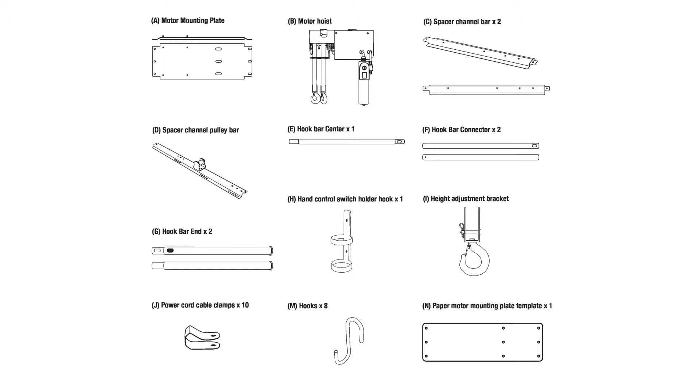The components in your kit include a motor mounting plate, motor hoist, 2 spacer channel bars, a spacer channel pulley bar, hook bar center bar, 2 hook bar connector bars, 2 hook bar ends, hand control switch holder, 2 height adjustment brackets, 10 power cord cable clamps, 8 hooks, and a paper motor mounting plate template.

The included hardware contains 12 4-inch lag bolts, 4 5/16 inch nuts, 2 1/4 by 1/2 inch bolts, 1 1/4 inch lock nut, 1 15 mm hole saw drill bit, 1 1/2 inch socket, 1 1/8 inch drill bit, 2 drywall screws and plugs, 10 30 mm screws, and 2 200 mm cable ties.

The tools required for this installation are a power drill, step ladder, pliers, safety glasses, ratchet, adjustable open-ended wrench, Phillips screwdriver, tape measure, pencil, stud finder, and a utility knife.

Determine the motor mounting location on the ceiling. An unobstructed operating space of at least 3 feet by 4 feet is required. The motor mounting plate should be installed at least 3 feet away from walls or any other obstructions and close to a power supply, preferably a ceiling outlet.

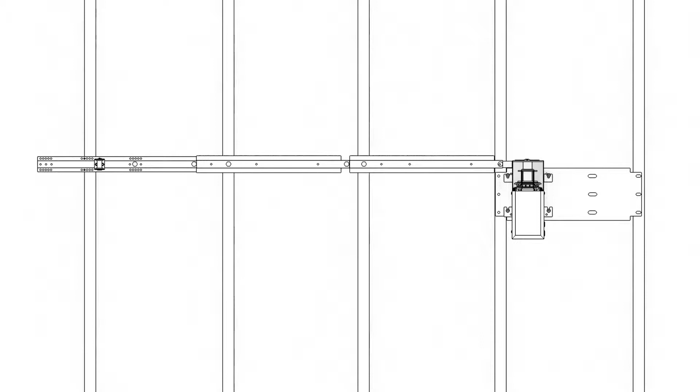The motorized lift is designed to be installed either perpendicular or parallel to the ceiling joists and can be installed on joists with 16 or 24-inch spacing. In the chosen installation area, determine the direction of the ceiling joists and the exact location of the ceiling joists by visually checking or using a joist finder or a very fine drill bit.

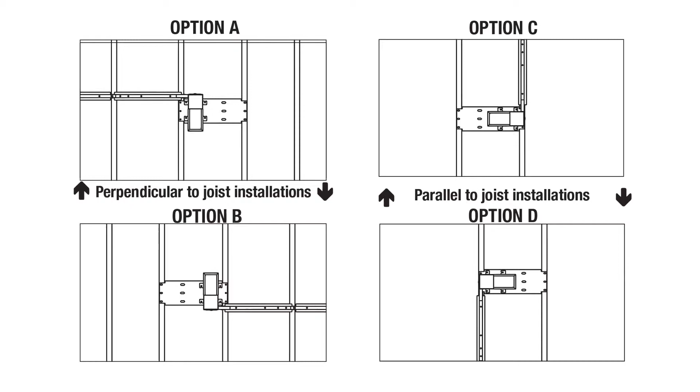4 installation options are illustrated below. Note how the motor mounting plate and motor hoist are positioned for your installation, in particular the location of the 4 fixed threaded bolts on the motor mounting plate and the 4.5 inch spacer channel bar attachment tab on the motor hoist. Determine how the motor mounting plate should be rotated or where the fixed threaded bolts should be located prior to fastening to the joists. Identify your installation option. For this installation video, we'll be installing option C.

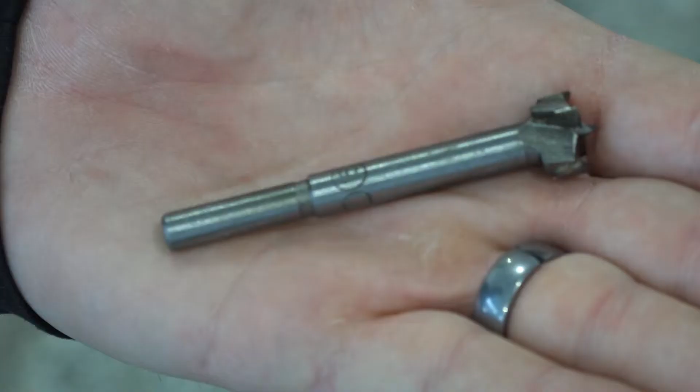Step 1. Position the paper motor mounting template in the installation location and mark with a pencil the 6 spots where the lag bolts will be fastened. It's very important that the wood screws are fastened to the center of the joists. Use the hole saw drill bit or cut away the drywall with a utility knife to obtain an unobstructed view of the width of the joists so that the exact center can easily be determined.

Step 2. Using a power drill with an 1/8 inch drill bit attached, drill 6 pilot holes into the center of the joists. Using the ratchet and 1/2 inch socket, fasten 6 of the 4-inch lag bolts into the joists until the motor mounting plate is securely fastened.

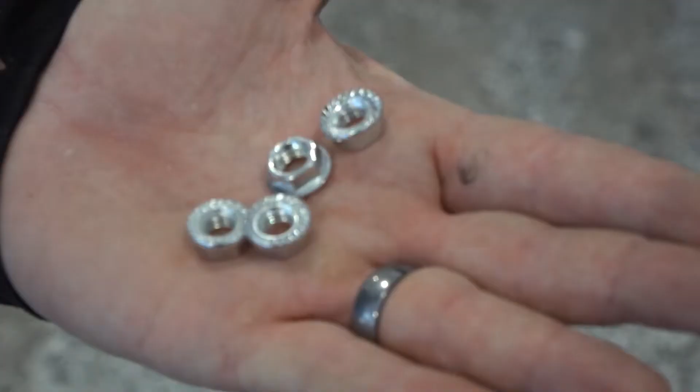Step 3. Slide the mounting tabs on the motor hoist over the top of the 4 fixed threaded bolts on the motor mounting plate. Once the motor hoist is properly positioned on the motor mounting plate, tighten the nut with the ratchet or the adjustable wrench until the motor hoist is securely attached to the motor mounting plate. Slide the motor hoist until the tabs are firmly against the threaded bolts. Do not leave any space between the bolts and the enclosed end of the mounting tabs.

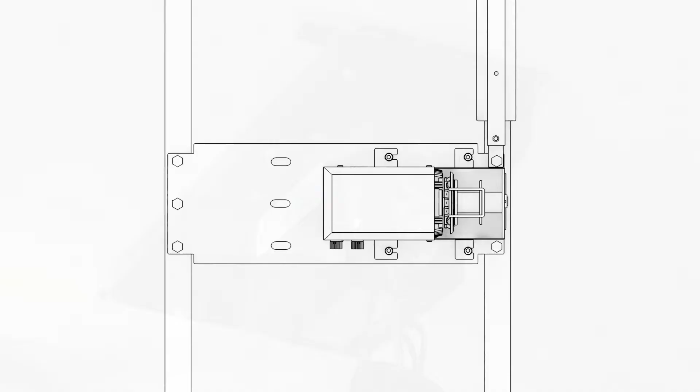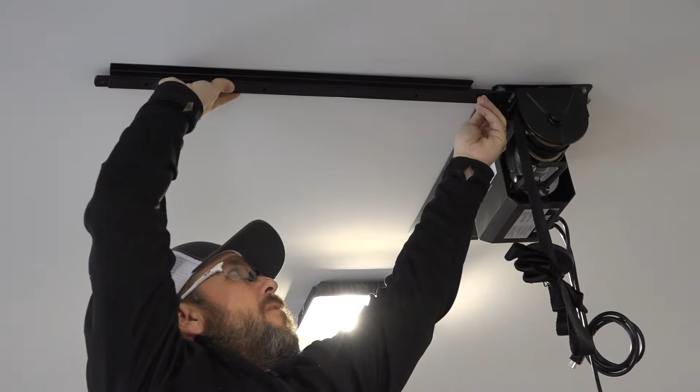Depending on your joist spacing, you'll use different holes on the spacer bars for installation. However, this doesn't apply to this particular installation video, as we're installing the spacer channel along a single joist. Step 4. Press the spacer channel bar flush with the ceiling and mark the ceiling with a pencil where a lag bolt will be used to attach the bar to the joist. Make a mark at the 21-inch hole. Remove the spacer channel bar.

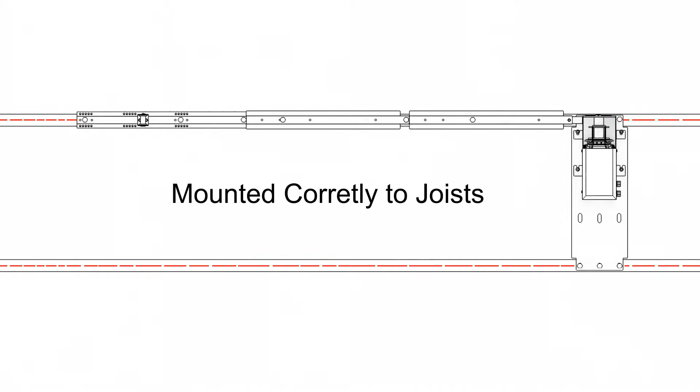It's very important that the lag bolt is fastened to the center of the joist. Use the hole saw drill bit or cut away the drywall with a utility knife to obtain an unobstructed view of the width of the joist so the exact center can easily be determined. It may be necessary to reposition the spacer channel bar and mark with a pencil where the lag bolt is to be fastened. Using a power drill with an 1/8 inch drill bit attached, drill a pilot hole into the center of the joist.

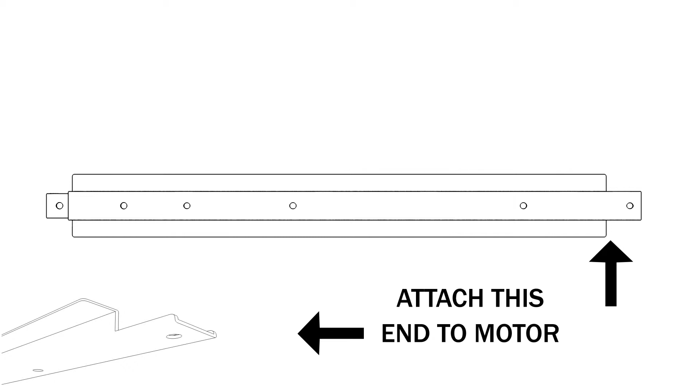Insert the flared end, or the end without a fixed nut, of a spacer channel bar onto the fixed bolt coming down from the motor plate tab above the strap spools on the motor hoist.

Attach a 6mm nut to the fixed bolt and tighten with a ratchet or adjustable wrench until the spacer channel bar is securely fastened to the motor hoist. Place a lag bolt and, using the ratchet, fasten the bolt into the joist until the spacer channel bar is

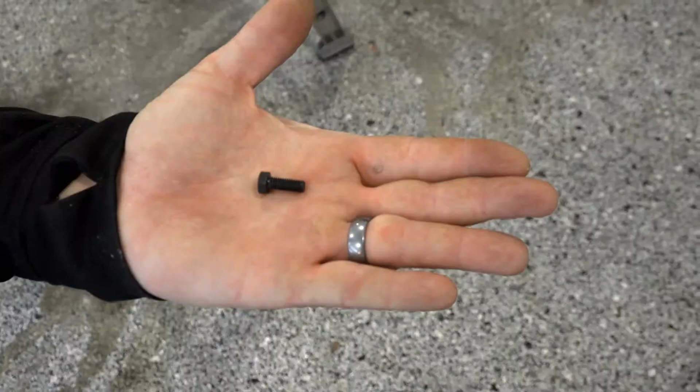securely fastened. Step 5. Line up the hole in the flared end of the spacer channel bar over the hole in the installed spacer channel pulley bar. Thread a 1/4 by 1/2 inch bolt into the hole and finger tighten.

Press the spacer channel bar flush with the ceiling and mark with a pencil where the lag bolt will be used to attach the bar to the joist. Make marks at the 5" and 21" holes on the spacer channel bar, measuring from the flared end of the spacer channel bar. Remove the spacer channel bar.

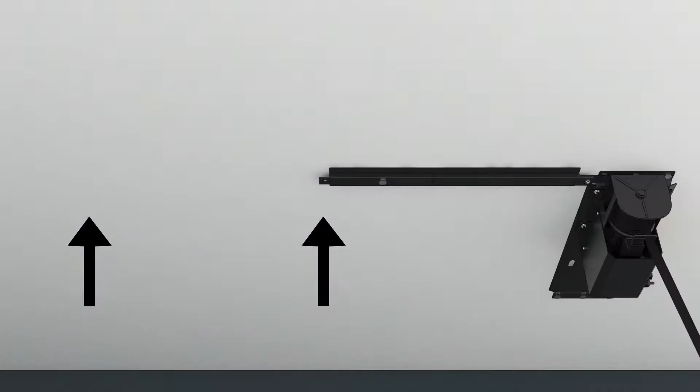It's very important that the lag bolts are fastened to the center of the joist. Use the hole saw drill bit or cut away the drywall with a utility knife to obtain an unobstructed view of the width of the joists so that the exact center can easily be determined. Place a lag bolt and, using the ratchet, fasten the bolt into the joist until the spacer channel bar is

securely fastened. Step 6. Press the spacer channel bar flush with the ceiling and mark with a pencil where the lag bolts will be used to attach the bar to the joist. Make marks at one hole before the pulley and one hole after the pulley, and mark with a pencil where the lag bolts are to be fastened.

Using a power drill with an 1/8" drill bit attached, drill 2 pilot holes into the center of the joists. Line up the hole in the end opposite the pulley of the spacer channel pulley bar over the hole in the second spacer channel pulley bar. Thread a 1/4 by 1/2 inch bolt into the hole and tighten with a ratchet or adjustable wrench until the spacer channel pulley bar is securely fastened.

Step 7. Place the straps coming out of the rectangular opening closest to the spacer channel bar over the top of the pulley at the end of the spacer channel pulley bar. Insert the clevis pin and refasten the cotter pin. Place the strap from the motor side through the stopper plate and attach the height adjustment bracket using the supplied

cotter pin. Plug in the motor hoist to the nearest 110-volt power outlet. Use the hand control switch and safely lower the straps until approximately 9 feet of cable is hanging down. Step 8. Secure the hand control switch holder to a convenient location on the closest appropriate wall using the power cord cable clamps and screws.

Step 9. Assemble the 3 middle pieces of the hook bar by lining up the spring clips from the hook bar center to the holes of the hook bar connectors. Slide the hooks onto the assembled piece. Attach each hook bar end to the assembled middle section by lining up the slotted holes from the hook bar end to the holes of the hook bar connectors.

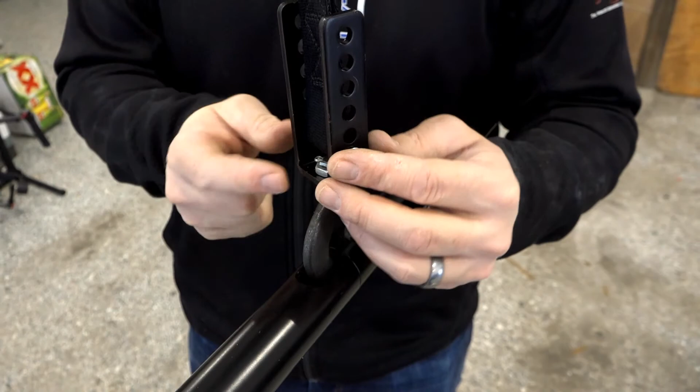Step 10. The height adjustment bracket is adjustable to make your straps and bars perfectly level. Lower your straps to eye level and adjust the pin in the height adjustment bracket to the desired hole to make your straps level. If your bar is not level, use the strap adjustment bracket that is located by the hook and push down on the hook bars to stretch out the straps.

To adjust, remove the cotter pin on the lowest side and reinstall at the higher hole. If your bar is still not level, use the second pin. Remove and install the cotter pin in the hole closest to the hook and pass your strap under it. Install your second cotter pin in the hole and through the strap in the desired location.

Step 11. To prevent unauthorized use, the Garage Gator 68221 is equipped with a key lock feature. When the key is turned to the off position or removed from the hand control switch, the unit will not function until the key is reinserted and turned to the on position.

Step 12. Press and hold the rocker switch on the hand control to raise and lower the hook bar. When the hook bar reaches the uppermost travel point, the stopper plate above the cable hook will trigger the limit switch, ceasing upward movement.